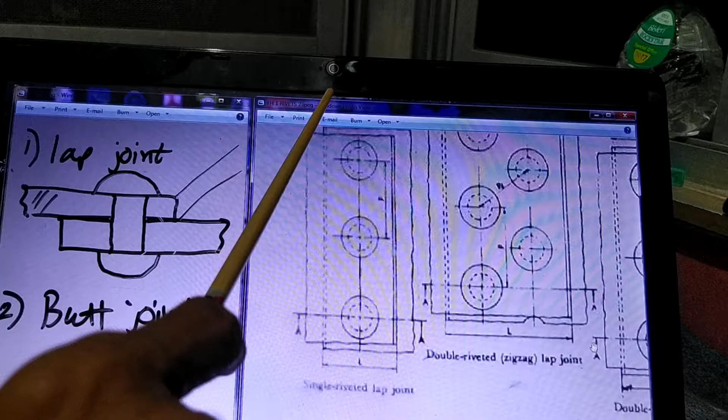Which will be used for connecting one plate to another plate. You will also see there are two lines here. Why are there two lines? The two lines are here because this particular end of the plate is not straight like what I have drawn. It has got some inclination like this.

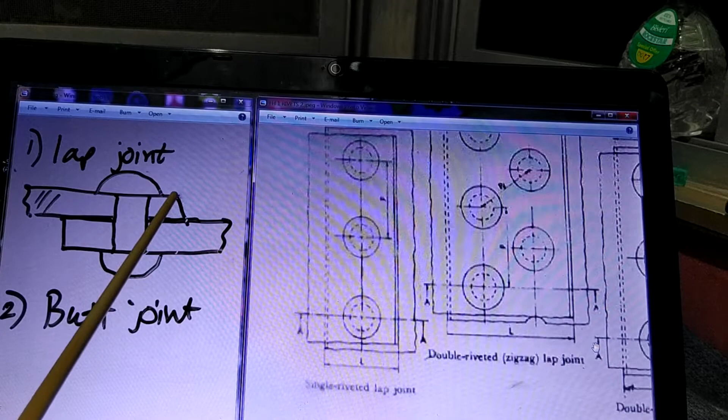So there is one edge here and one edge here. That's why there are two lines, drawn to show the edge. Similarly, this also has got slight inclination like this. So when you see from top, these two edges are there which are not seen, so they are shown as dotted lines.

So this is a lower plate. What I have now shown is a lower plate, meaning this plate. And the upper plate is this one, shown with the edge as double lines. Here the length is not final—this can increase, this can increase. Only the end joint is shown.

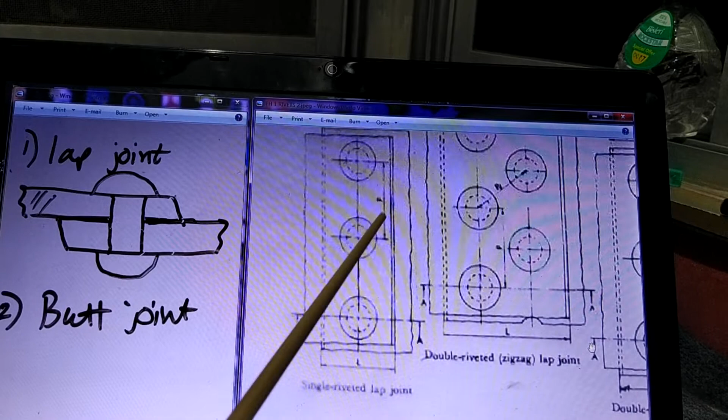So this is a single riveted lap joint because of the single line. You can see they have shown one dotted circle here. This dotted circle is for the stem of the rivet, and this outside circle shows the head of the rivet. So this is the head, and the dotted circle is for the stem.

So like that, three rivets—the distance from this center to this center is called the pitch distance. And you can see here the overlap is shown by letter L. And the cross section, if you take a section of the plate from here, then how it is seen is shown here.

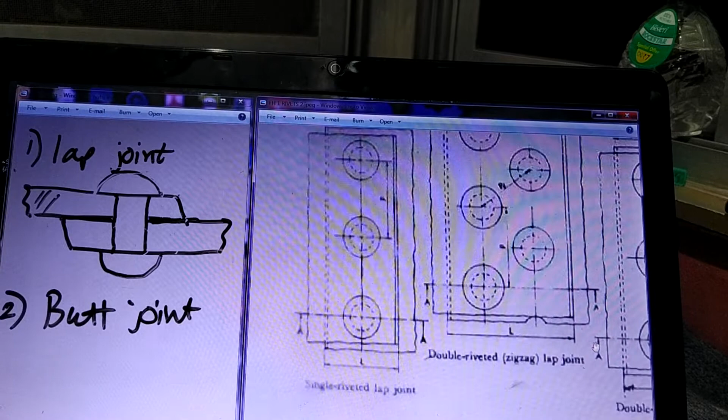So now you can see this is what we already discussed. And the section at this place, if you take it, you can see this is the top plate. In fact we have already drawn the same thing. This is the top plate, this is the plate below. This is the inclined line, inclined line, inclined line, inclined line.

You can see the section lines are different because this is a different plate, this is a different plate, this is a different plate—so the section lines are different. And then there is a rivet. You can see the margin is shown, the distance from this end to this end. There is a margin, and T is the thickness of the plate.

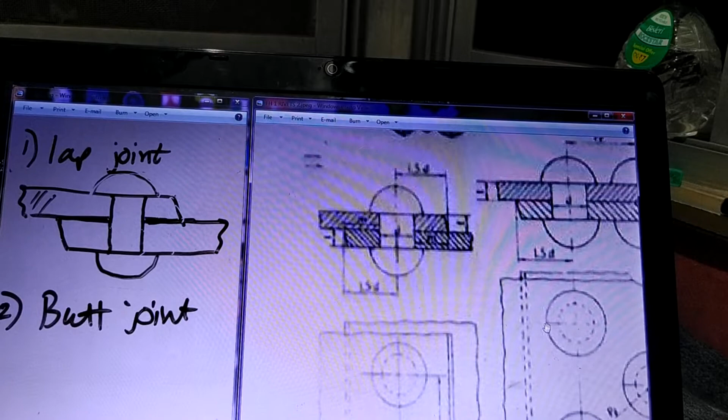So this is called a single riveted lap joint. Now I'll show you the full figure—this is the single riveted lap joint sectional front view, and when you see from top, it will look like this. Why is it called single riveted? One line of rivet.

Why is it called a lap joint? Because it is overlapping like this. So this is one simple joint to understand. After we understand this, let's see what are the other figures.

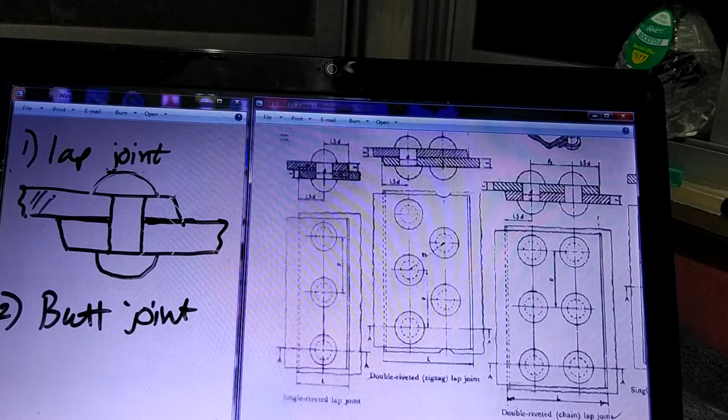Now you will see here it is written double riveted zigzag lap joint. So this is also a lap joint, this is also a lap joint. This one is single riveted, this one is double riveted. Now what does it mean? Again there are two plates, and these two plates are overlapping like this.

And then here there was just one line, but now what you see here, this overlapping distance—here it was L—now the distance is much larger, so a lot of space is available. So instead of one line of rivets, there are two lines. You can see one line here and one line here.

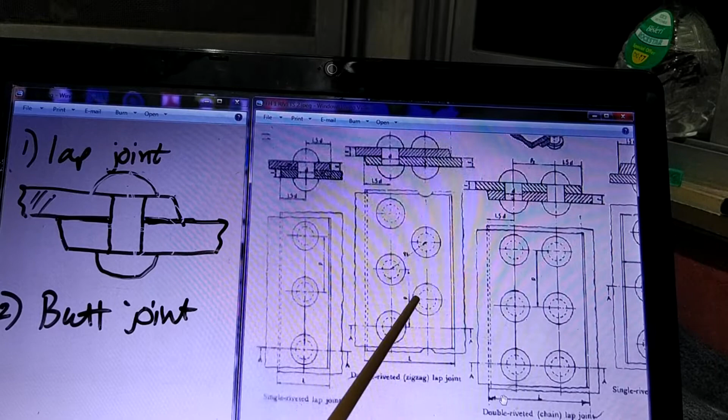So there are two lines used for fitting the rivets so that the joint is stronger compared to this. As per the requirement, two lines of rivets are fitted, and this is called a double riveted lap joint. Now when there are two lines, there are two options available. The way it is shown here, the rivets are arranged so that this rivet is in between the gap of these rivets.

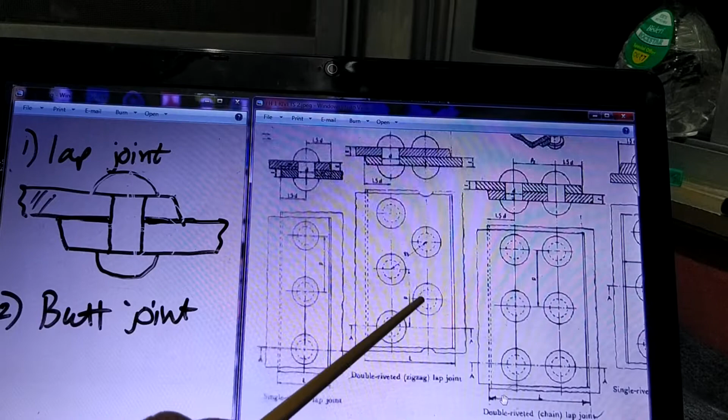So in the gap of these two rivets, at the side, the next line rivet is there. This is called a zigzag type of double riveted lap joint. You can see how the section is shown. When you take a section like this, one rivet is cut, the other rivet is not cut. So you can see this rivet is shown in section and this rivet is shown only by its head, because the stem part is not cut.

This is the sectional front view of the double riveted zigzag lap joint. Now this is again another joint.

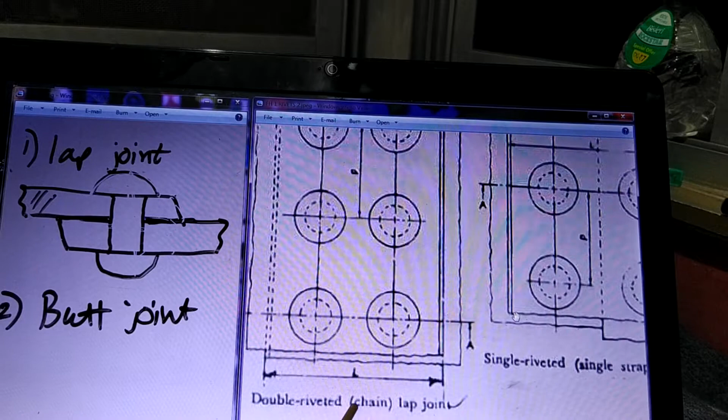This is again a double riveted lap joint, but it is called a chain lap joint. Earlier was a zigzag, now it is chain. Chain means the second line and first line, the rivets are adjacent to each other. In the earlier zigzag case, this rivet was here, so it was in the gap, forming a zigzag pattern. See, this is a zigzag pattern and this is a chain pattern. So: double riveted zigzag lap joint, double riveted zigzag lap joint, double riveted chain lap joint.

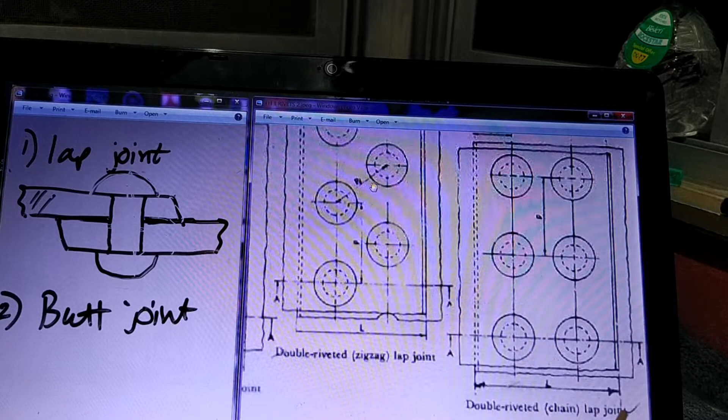Accordingly the sectional view is drawn. You can see the section is passing from both the rivets, so the stem is shown in both cases. There is one more figure to be seen here.

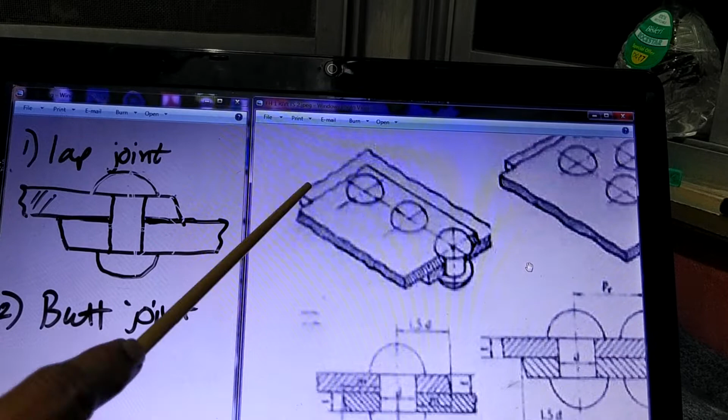In the earlier case, single riveted. This is an isometric drawing shown just to show how it looks. So one plate, second plate, this edge is a straight edge. For the lower plate, this edge is a straight edge. This edge has gone under this plate, and the remaining shape is incomplete. It is more than this, but it is not shown. Only this part is shown.

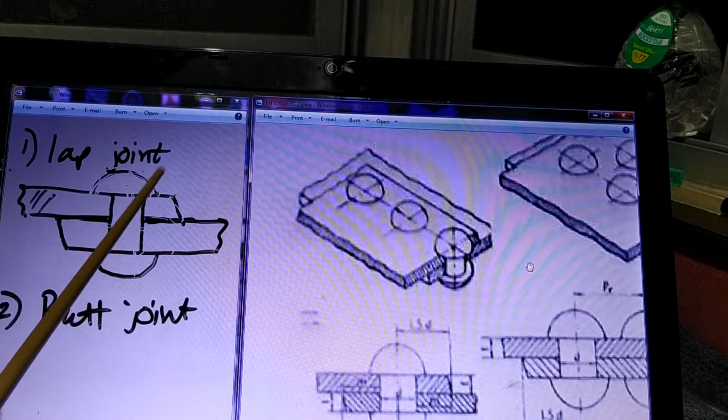You can see how the head is shown. If you observe this head shape very closely, you will see that this head is a half sphere. Last time we have drawn a half sphere in isometric. So this half sphere, if you see, it is cut. So in this figure, the lower part is a circle and the top part is a sphere.

So this is like a circle shown as a sphere, and here it is shown like an isometric circle by the 4-center method. But we are not going to draw this by proper procedure because it's freehand work. When you draw, see that this shape is like an isometric circle and this shape is like a sphere, that means like a circle. So that is how the shape is for all the heads. When you observe this figure closely, you will come to know that it is in two parts: one is a spherical shape and the lower one is an isometric circle.

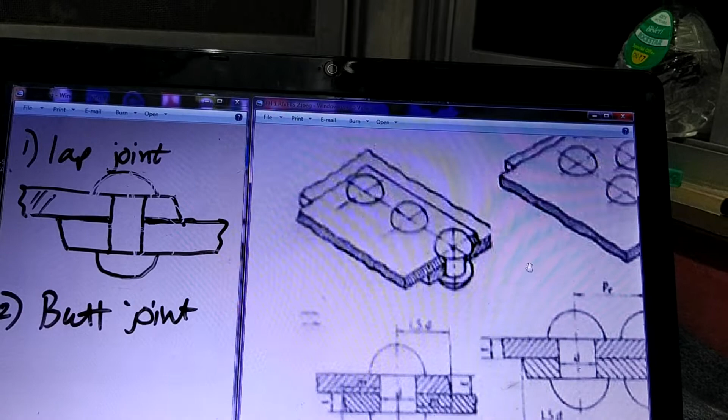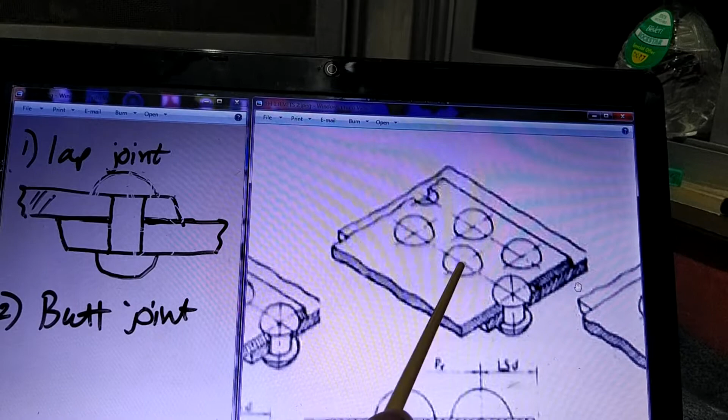Now see how the double riveted zigzag type lap joint joins two plates. Then double riveted chain type lap joint. This is double riveted zigzag type lap joint, and this is double riveted chain type lap joint, which we have already seen. So at this stage we have discussed points 1, 2 and 3.

Now let's see the remaining. As you see here, it says single riveted, single strap. Now this is a new word, strap: single riveted, single strap butt joint. This is a butt joint. Last time it was a lap joint, it was like this. Now here there is a butt joint.

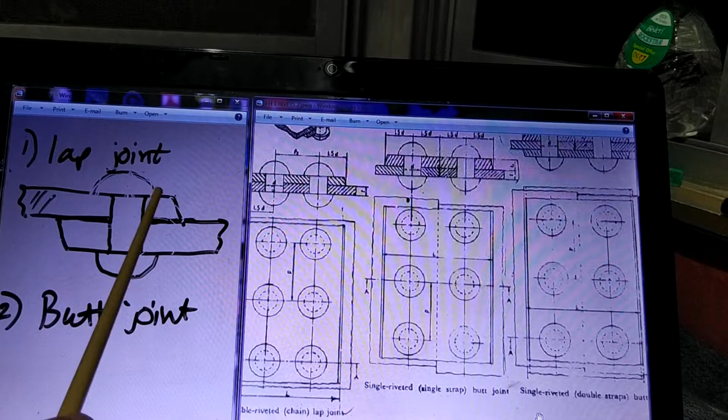What is the difference between lap joint and butt joint? First, you will notice that the two plates which you wanted to join are overlapping one above another, that means they are not in one level. Now in certain cases, when you want to join two plates, you want them to be in one level. You don't want to overlap them so that the level will not change.

So what is done is, I'll draw one plate. This is one plate and this is the second plate. They have brought the two plates so that the two plates are touching each other by the ends, like this. But then how do you form a rivet joint? You need to form a riveted joint, so you need some kind of overlap. But these two plates you are not allowed to overlap.

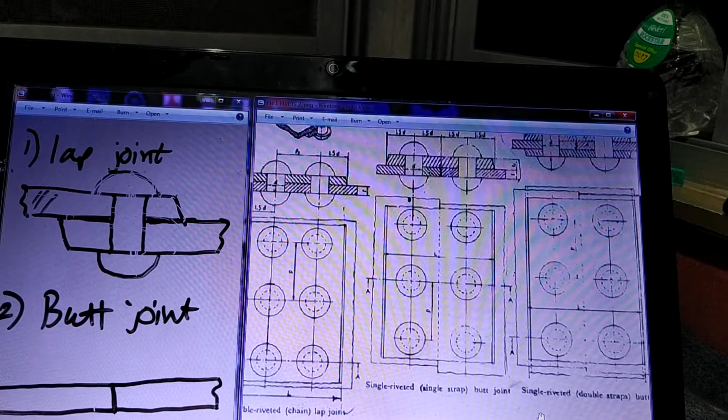So what is done is, on top of these two plates, an additional plate is kept like this. This extra third plate is kept here. This plate is called a strap plate. Single strap means this is a single plate kept overlapping between the two main plates, so it is called a strap plate. Now once you put this strap plate, you can put a rivet here.

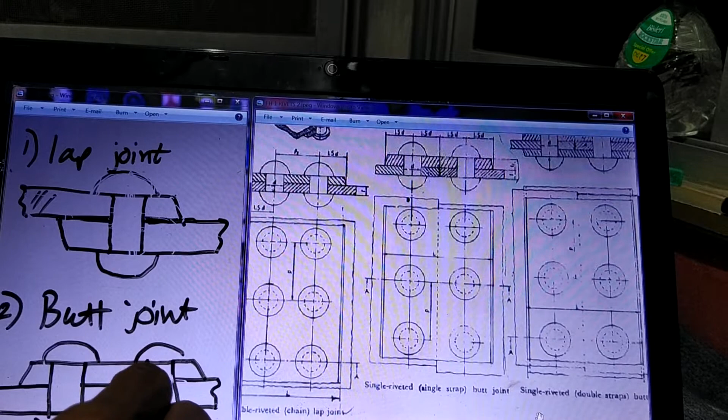So this is one head, another head. This is one plate and this is another plate, and this is the third plate. We have to show it by section lines. Now these section lines should look different from the earlier section lines, so I am drawing them closer than this. So now you can clearly see there are three plates: this first plate, second plate.

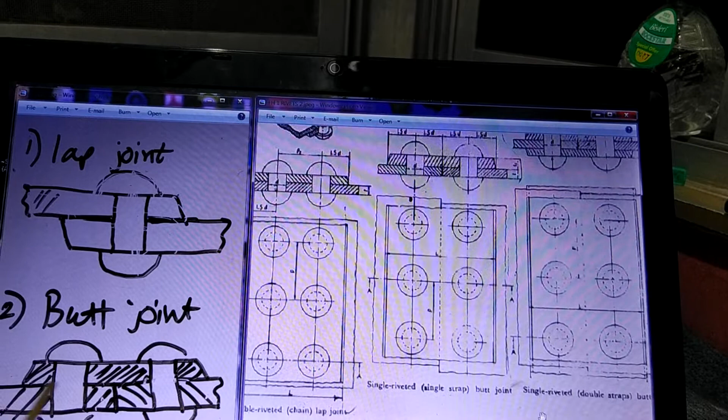Now these two plates we want to join, so they are like this, and the third plate is a joining plate, called a strap plate. That strap plate is put like this and then the riveting is done. So you can see the two edges of the strap plate like this. For the main plate, this edge is a straight edge, not inclined like this, it is a straight edge, and these two ends are touching each other. Such kind of a joint is called a butt joint.

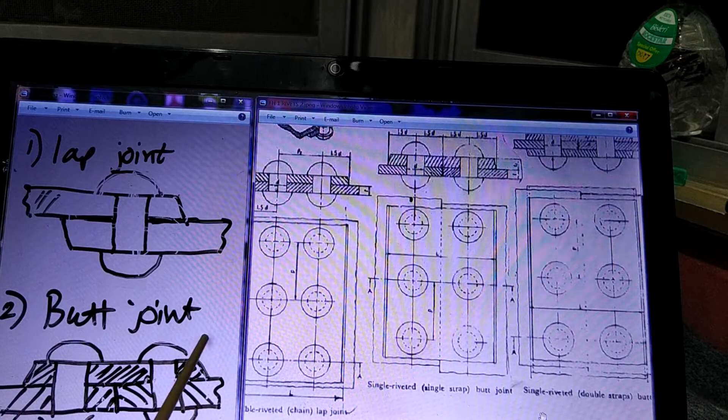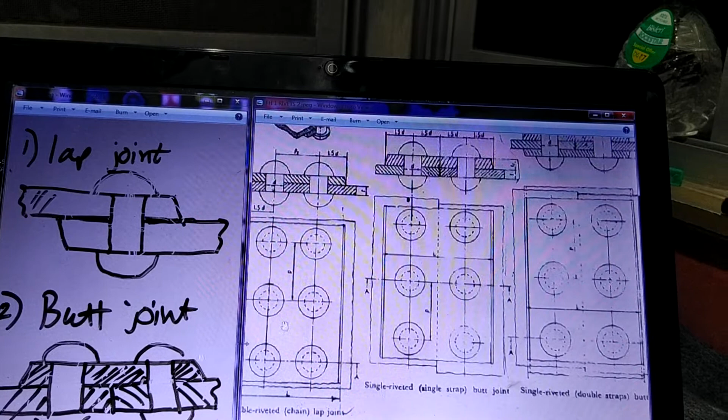Now this example is single riveted, because on one plate there is only one line. Although there are two lines, these two lines are on two different plates, so on a single plate there is still one line. So this is called a single riveted, single strap butt joint.

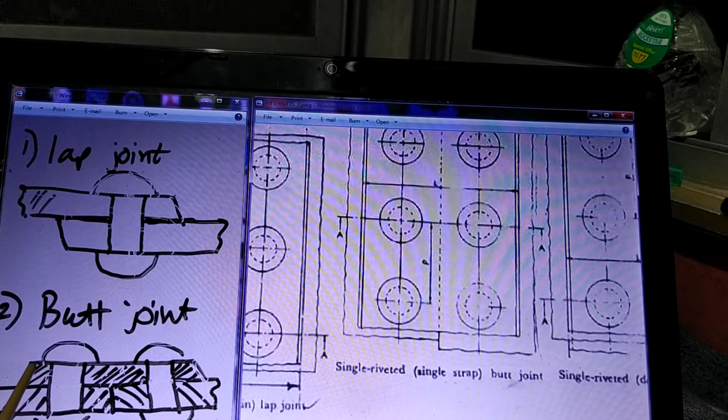So you can read here, single riveted, single strap butt joint. It looks like this - this is first plate, second plate. This dotted line shows that these two ends are touching each other. Then these double lines show the edge of the plate which is inclined. This is one line of rivets on one plate, another line of rivets on the other plate. So on each plate there is just one line, single riveted. And this part here is a strap, so single strap butt joint.

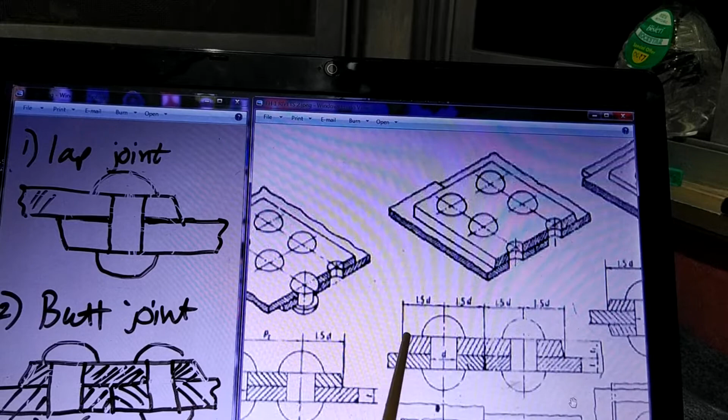Now let's see how it looks in isometric and sectional view. So you can see here the sectional view. This is same as what is drawn earlier - one plate, this; second plate, this. Strap plate, this is the strap plate. And then first line of rivet, second line of rivet.

In the isometric, if you want to see, then it looks like this. You can see there is one vertical line here - that means this is one plate. From this vertical line on this side is another plate. So these two plates we are going to join, and for joining we are putting one more plate on top. You can see this is a third plate. Now this plate is called a joining plate.

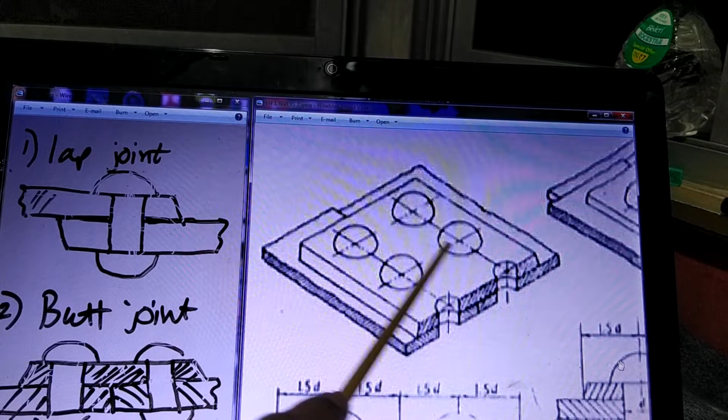It is called a strap plate. So strap plate is only one plate in this case. It is put on the two plates and then the riveting is done. Single line, single line - so single riveted, single strap butt joint. And you can also see the proportions are written: margin distance 1.5d, thickness t and so on. Pitch distance also may be shown here - pitch distance P.

Okay, and then the section is taken from here. So now we have seen 1, 2, 3 and 4. Now what is this? We will see that.

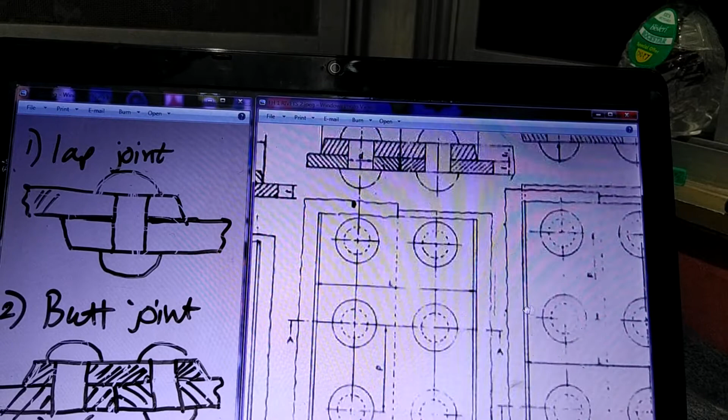Now what is this called? It is called a single riveted double strap butt joint. See the difference is double. Last time we have seen single riveted single strap butt joint. So everything is same except the straps are going to be double. That means we are going to put a strap plate like this - so in this case we are putting one strap plate above and one more strap plate below also.

So you can see that in the sectional view. You can see here these are the two plates which we want to join. Above that there is one strap plate put just like this. And in this case there is one more strap plate which is put below, here. So now there are two strap plates, and there is still a single line of rivets. So it is single riveted, double strap butt joint.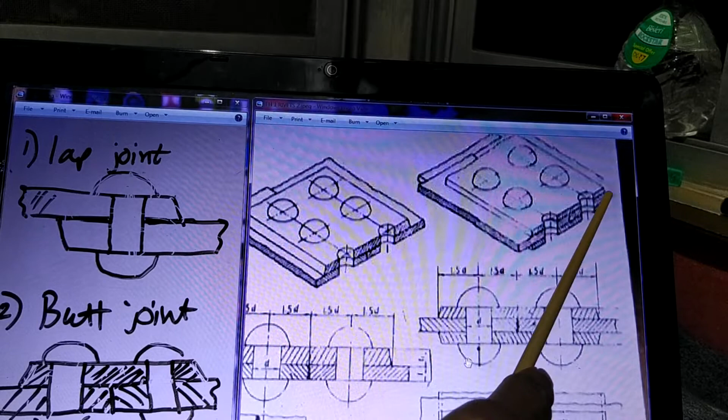So now you can read it. You can also see here - one strap plate here, one more strap plate here. And then in between the two there are two plates which you want to join. You can see this line showing the edge. Whereas here there is no edge because this is a single plate. Here also there is no edge because it is a single plate.

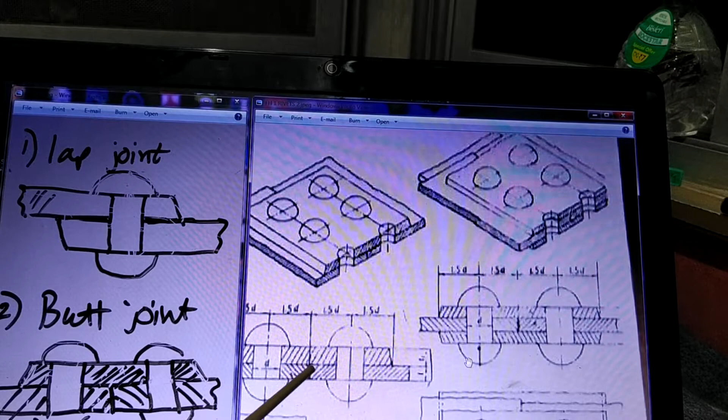Here you see there is some line, but this line is a dimension line. This plate is a single plate, so there is no partition here. The partition is here - this and these two are different plates. This is the edge of the plate. Here there is no edge. Remember, when you draw this, if the figure is not drawn clearly, this line seen here may be mistaken, but this is a dimension line. You have to draw it light, and it should be seen as a continuous plate. Don't make a mistake here.

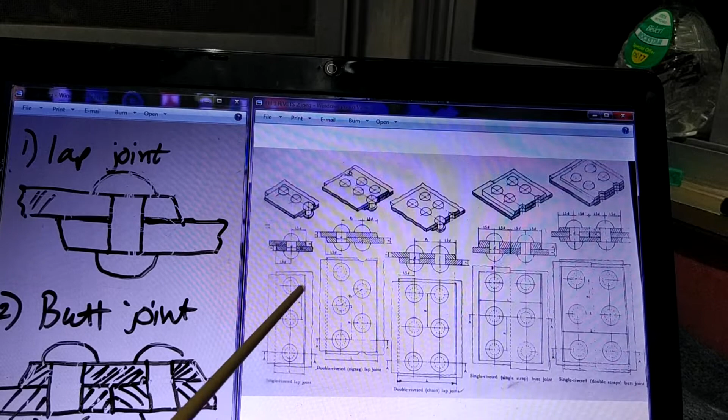So this is called a single riveted double strap butt joint. Let us see all the joints at a time. So you can now see single riveted lap joint, single riveted zigzag lap joint, double riveted zigzag lap joint, double riveted chain lap joint. Then here it is single riveted single strap butt joint, single riveted double strap butt joint. These are their isometric figures and these are the sectional views. So this page will explain everything in a very correct way which you have to remember.

Now, does this mean that there are only these many types? No. There can be single riveted, like there can also be double riveted double strap. That means instead of one line, there could be two lines on each plate.

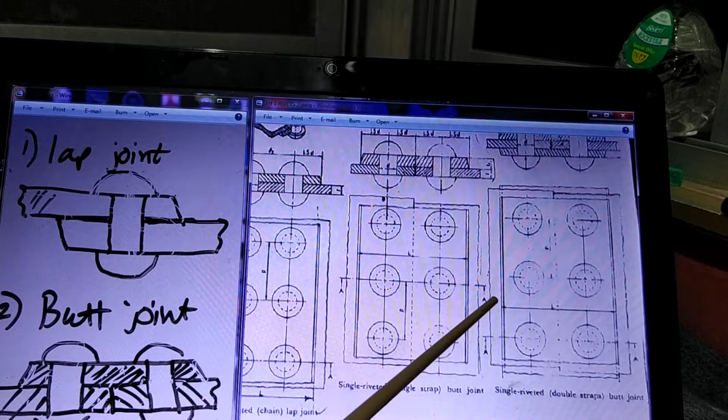So 1, 2 here and 1, 2 here. So the name will be double riveted double strap butt joint, or double riveted single strap butt joint. It can be single riveted, it can be double riveted, it can be single strap, it can be double strap, and so on. So accordingly there can be different types of riveted joints.

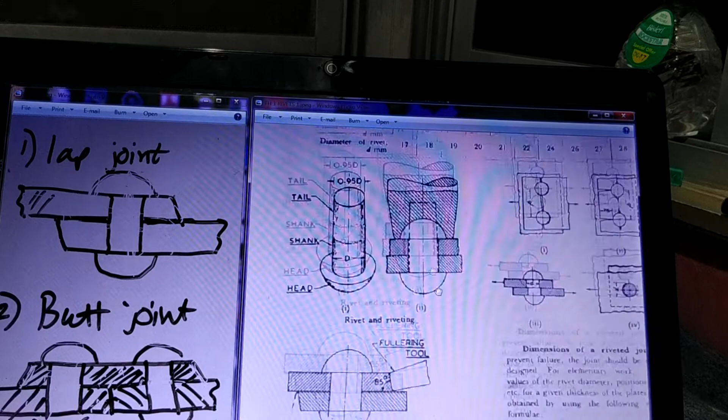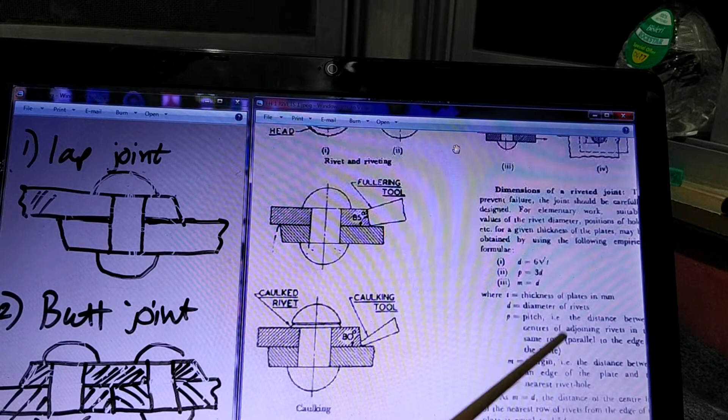So today we started from here, and on this page we saw different types of heads of the rivets. Then we saw a table showing the relation between the plate thickness and the diameter. Then we saw how the riveting is done. We also saw the different types of failures of rivets, and then we also saw the joining, how joining takes place. We saw the proportion of the dimensions, and on the next page we saw how the plates are joined by making use of rivets.

Now you may have seen these rivets at different places. Say for example, when you visit through railway, you can see the side panels of the railway, where you are sitting on the chair. Even on the chair, if you see the wooden plate that is fitted on the chair, that is fitted with the help of rivets. The side panels which are there, side panels where the window is cut. So if you see how the panels are made, there also you can see a lot of riveted joints.

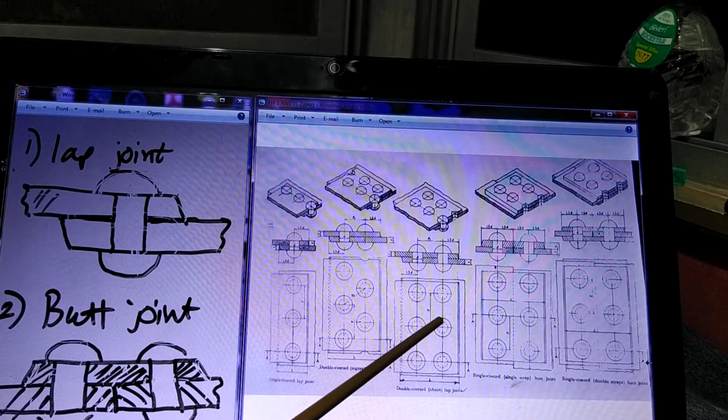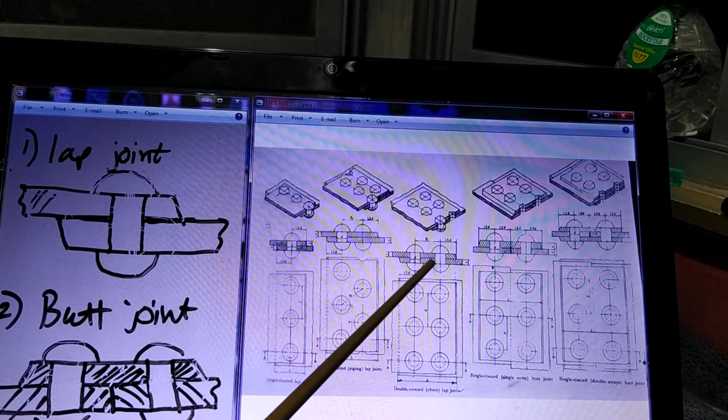Even for your purses or some kind of pockets or some such things, you can see even for the bags, the handle of the bag is fitted to the bag where riveting is done. So this kind of application you can see of the rivets, more of a commercial type consumer product, but this is an application of riveted joints which is more serious. Serious in the sense, here the joint is formed for taking very heavy load. That means the load is very large and the diameter of the rivet has to be designed so that it will not break by different methods.

Now I'll show you one way in which the riveting is done. Sometimes riveting is done to form a cylinder. So I'll draw how it is done.

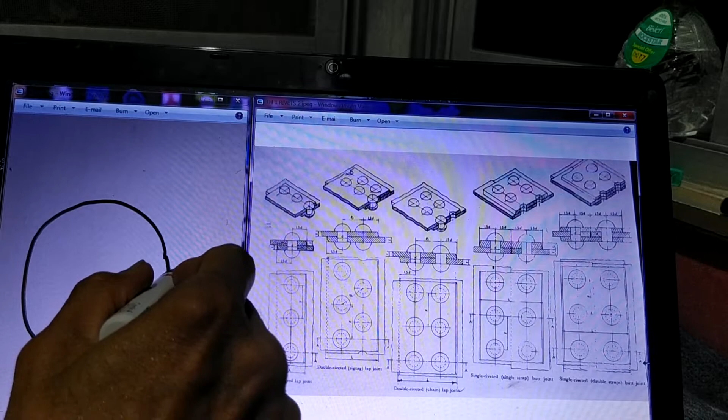So I have drawn a section of a cylinder. You can see this is a plate which is turned to form a cylinder, and then here these two ends have come close to each other. Then what is done is, here a strap plate is put, and then at this place riveting is done.

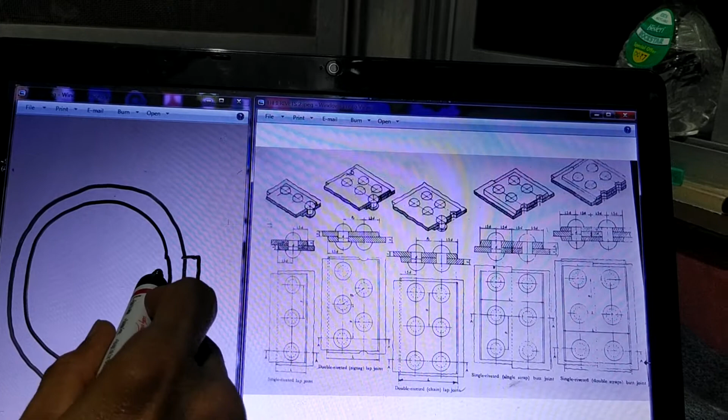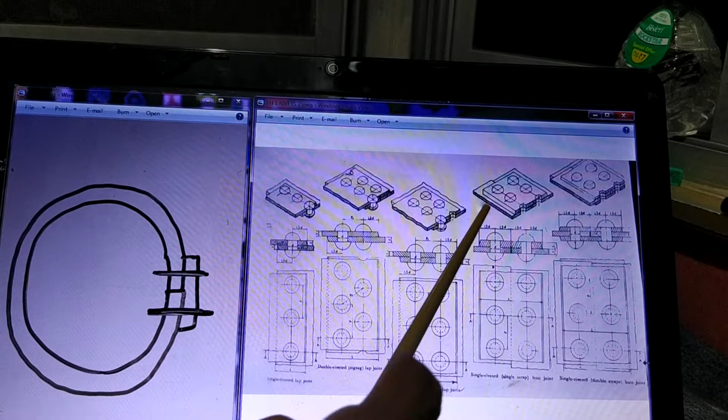So now if you look at this place, you will find that these are the two plates which are forming a butt joint, like this butt joint, and then on that there is a strap plate put, and then between the two riveting is done. So exactly what is shown here, that is shown here, and it shows that a cylinder is formed, like some kind of a container is formed with the help of riveted joints.

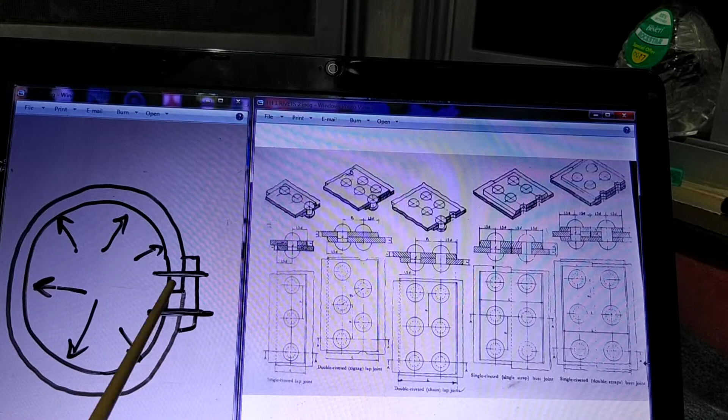So when there is a pressure inside this container, suppose there is some gas or some liquid inside, then it will exert a pressure on the wall of the cylinder, and that will show the tendency of this rivet, tendency of the plate to move like this. So the load is applied on the two ends, and these two ends will try to go away from each other, and the joint will be trying to open, which we don't want to happen.

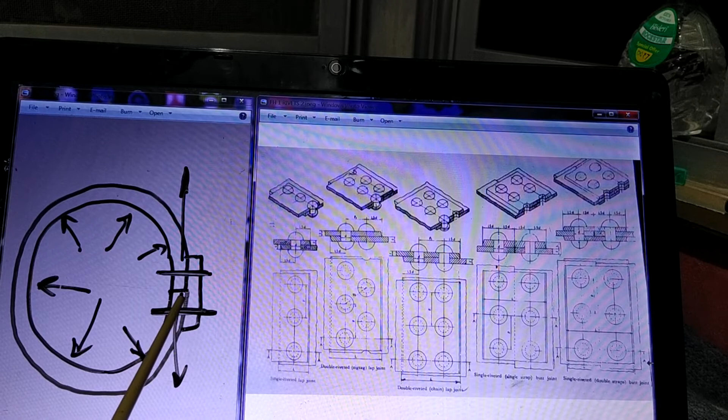So the strap plate and riveting, when it is done, should be so strong that this plate will not open and the rivets will not break from here. Now the rivet breakage, we have already seen the different ways in which the rivets can break, or the failure will take place. So there could be a tearing, some tearing will take place between the rivets, between the edges, the rivet itself will break, or the plate will get folded. That is a bearing failure. So any such failure will take place, which we don't want to happen.

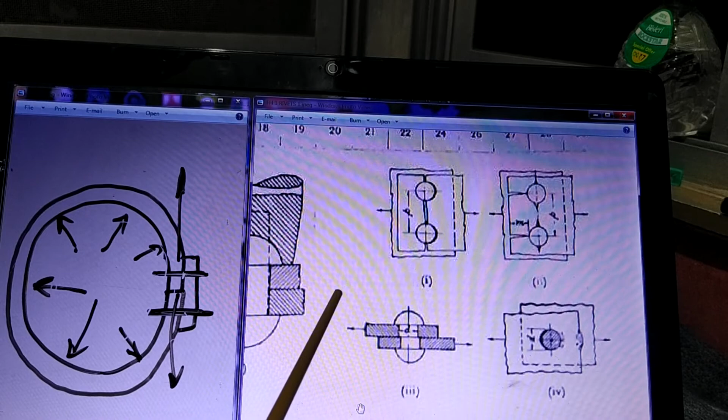Accordingly, the dimensions, the distance between the rivets, the distance up to the margin, the diameter of the rivet, etc., all these things are decided based on some design, so that this kind of failure will not take place, and this cylinder will be formed properly, and it can withstand all the pressure that is inside. When we move further in the machine design subject, that time we will see how to design the rivets so that this kind of cylinder and the joints will not fail.

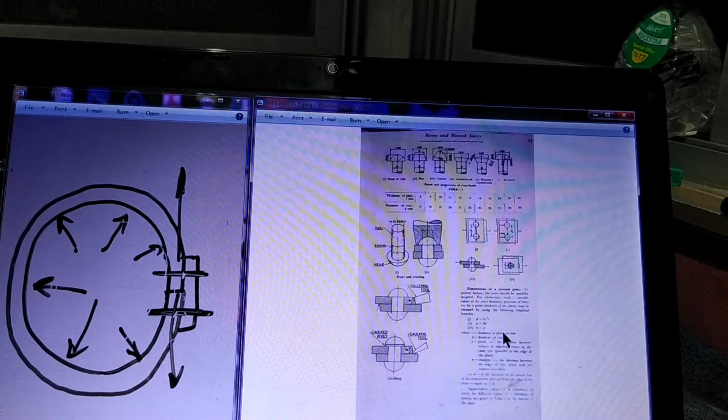Okay, so today our objective is to just learn the different types of rivets, and that we are done. On one page there is a description, and on the next page also there is some more information like this, which we have discussed today. So this is going to be your practice sheet number 5, and the title is Rivets and Riveted Joints. P5, Rivets and Riveted Joints.